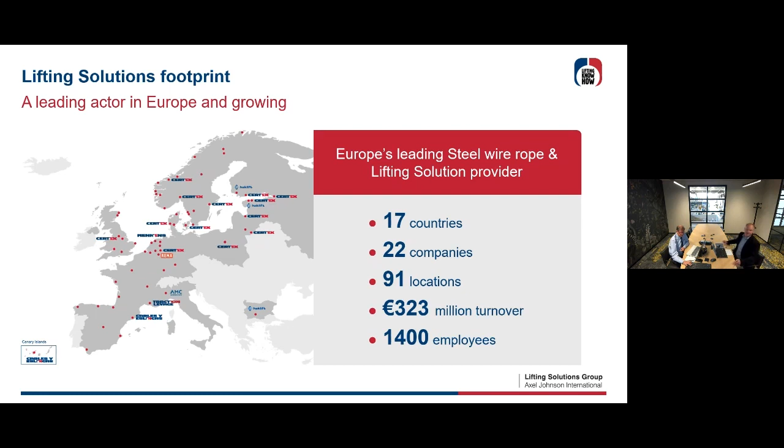A very warm welcome from Alain Ballman. I'm a Flemish Belgian, and I've been 35 years now in, let's say, the same company, Mennens Certex. I'm doing investigations, advice, climbing into cranes - even though I'm 61 now - doing reports. We have a laboratory to investigate steel wire ropes and so on. So if you have a question, just call us, we'll do our best.

These are the subjects we're going to tackle in this webinar. For those who didn't see the first presentation about the basics, we'll rehearse a little bit what we saw last time. If you really want to see the first webinar, you can click on the link, or we'll send it to you - it's basically about steel wire, wires, ropes, and constructions.

So we're going to elaborate on high performance ropes today: what is the difference with the general purpose ropes we saw last time, the advantages of these high performance ropes, and the applications. The second chapter is about rotation resistant ropes, a completely different kind of rope - what is it, why, classifications, and applications.

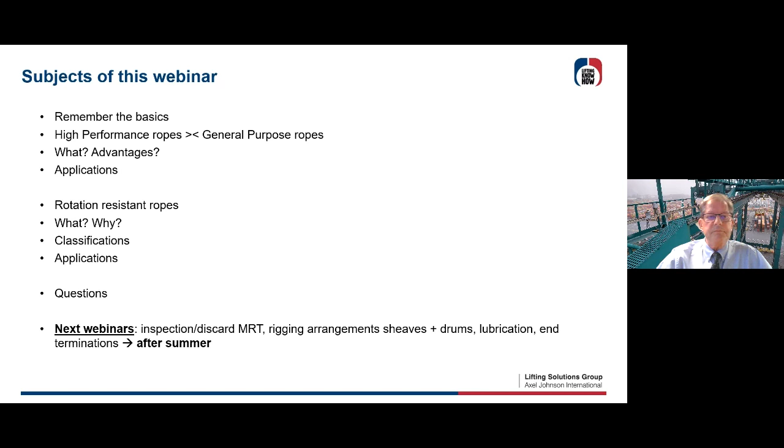Okay, let's start again with what we saw last time, a little bit of basics. This is how normally a wire rope looks like: you have a rope which consists of some strands, 6 or 8 or more, and in these strands you have your separate wires.

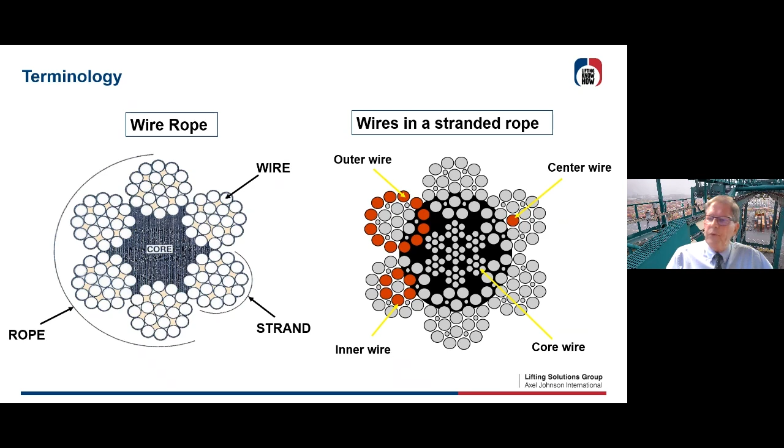If you look on the right side, you have the outer wires in one strand, which come into contact with sheaves and with your drum. Inside the strand you have the inner wires, shown in red. And in the center of each strand you have the center wire. So 6 or more of these strands surround the core, forming an independent wire rope core inside your 6 strands.

So we explained last time how a wire rope is made. We do that in 2 steps. The first step is making strands. Here you can see on the machinery the stranding, and then we put some lubrication into the strand.

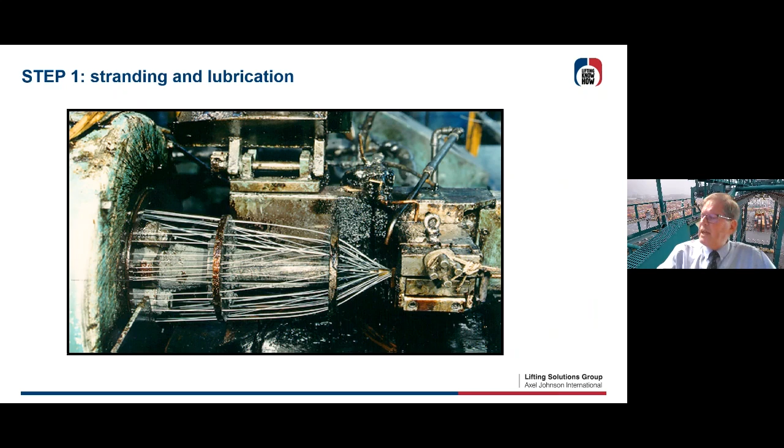The second step is that we take 6 or more strands, put it on another machine, and do the closing of the wire. So we put 6 strands around a core, and you see the preformation. The preforming is the helix we do with each strand before it goes into the knot, so that the preformation makes the rope eased and flexible.

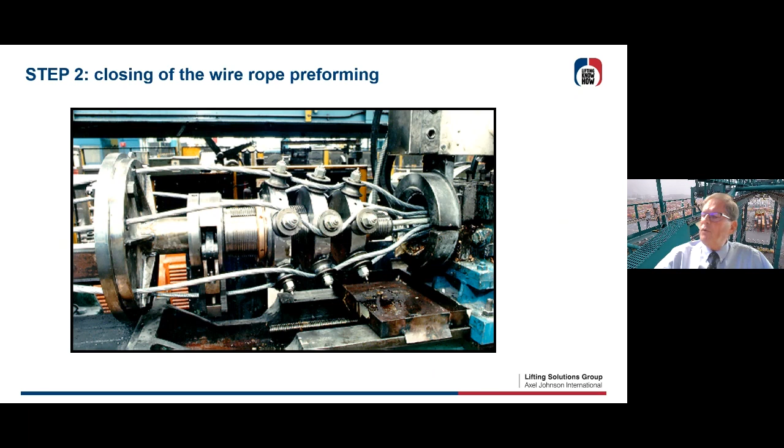General purpose ropes, often used, are 6-strand ropes. Here you see the 6x36 Warrington Seale with the independent rope core on your left side, or there are some who prefer a fiber core, a man-made fiber core inside, which has the advantage that you can have a certain amount of grease inside your rope, so there will be greasing coming automatically during the lifetime. You see the advantages of the steel core versus the disadvantages of a plastic core, as we explained last time.

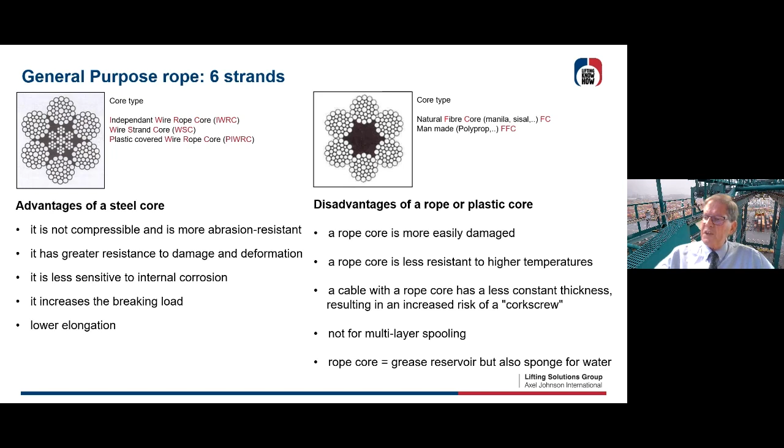You could also use 8-strand ropes. These ropes have 8 strands on the outside, and you see there's a little more complicated inner wire rope core needed to fill up this space. But you have the advantage that the rope is much rounder, comes more into contact with your sheaves, so you get lower contact pressures, less wear into your grooves, and a more flexible rope. So it's normally going to last longer.

Keep that in mind: 8-stranded ropes are more flexible, and a bit more expensive, of course, because it's more difficult to produce - you need more different kinds of wires. But it's always interesting to have a longer lifetime on your crane.

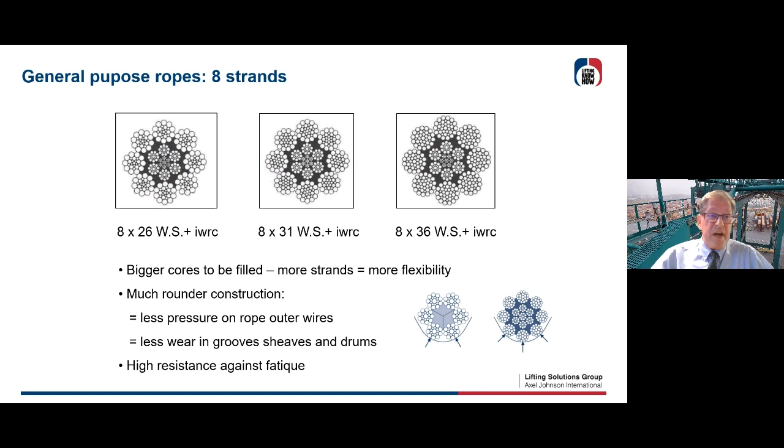And then we talked about the rotation resistant ropes. These are ropes where the core is inverted. We said every rope with more than 10 strands on the outside would normally be a rotation resistant rope - a non-rotating rope, or in French, anti-giratoire. So the core is inverted. This is especially useful for very high hoisting applications like tower cranes, mobile cranes, or if you only have one part hoisting, then you normally need rotation resistant ropes.

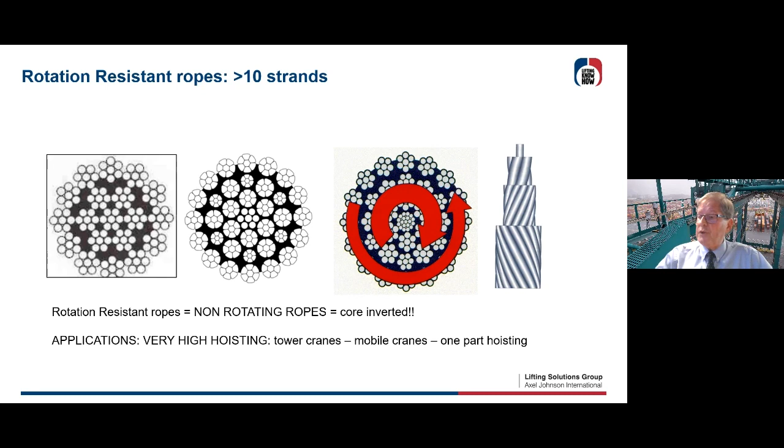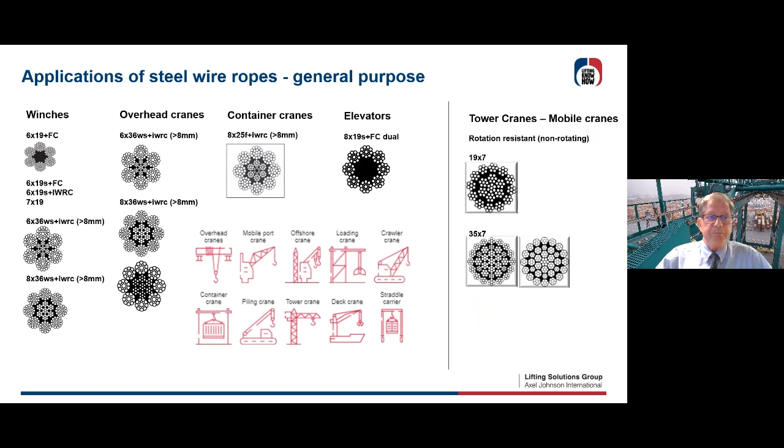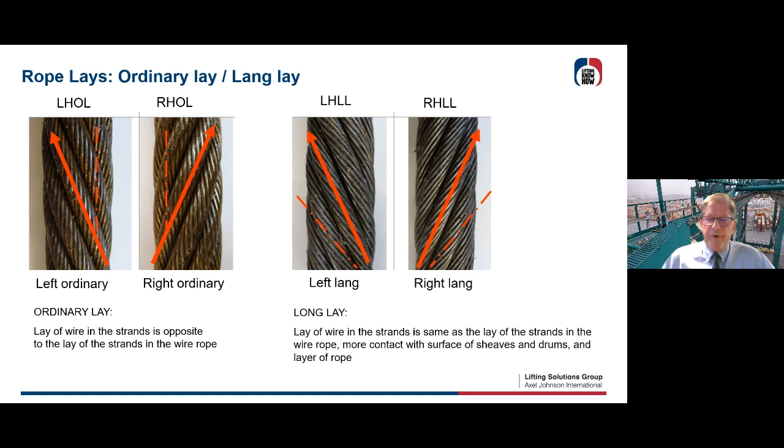We explained why you really need right and left-handed ropes. If you put a load on a 6 or 8-stranded rope, this rope will open up, so you get a torque or a moment in your rope. The more load you put on the rope, the more torque you get, the more rotation you get on your rope - so your load will turn.

That's why in some applications you need a left and right hand rope, so that these moments of the left and right rope end up together as zero, and then your load will stay straight. That's why in some applications you need left and right hand ropes combined in a set, so you can easily work. You also need left and right handed ropes because drums have left or right cut grooves - on left grooves you normally need a right-handed rope and the other way around. So that's why you really need right and left hand ropes in some applications.

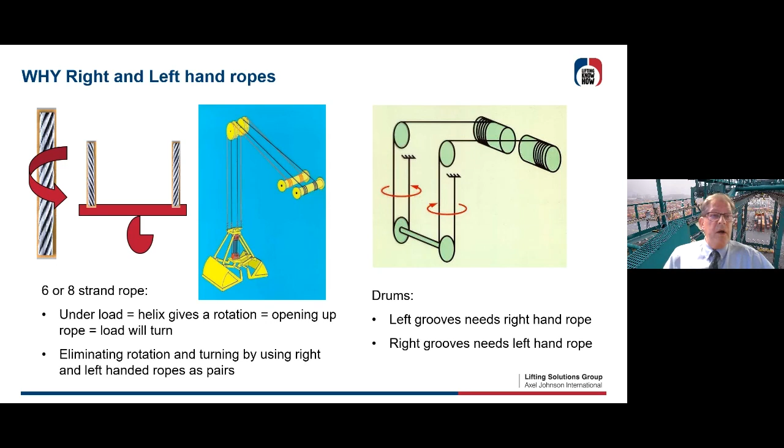Okay, now let's talk about high performance ropes. What do we mean by high performance?

They do the job, but if you want something special, then we could advise you to go to the high performance. And what is high performance?

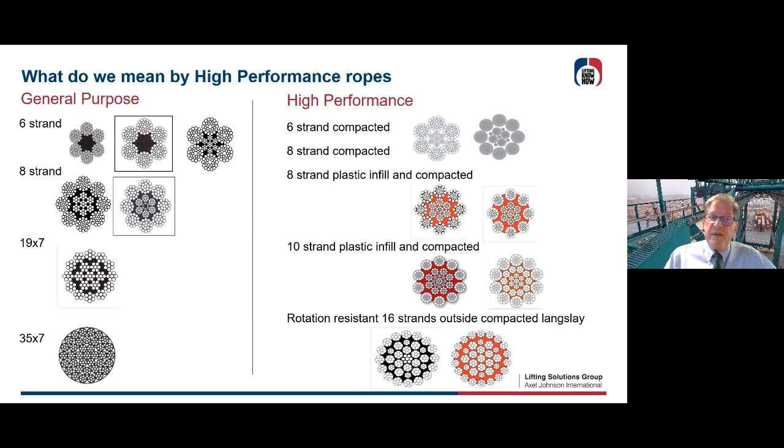More specialized ropes will be 10-stranded ropes with 10 strands on the outside. So you're going to have a rounder rope, stronger, and also with the plastic infill and also compacted. And the rotation resistant ropes, we call them high performance if they have 16 strands on the outside, eventually compacted, in Lang's lay on the outside, and also if you want with a plastic infill. So this is the big difference between high performance ropes and general purpose ropes.

So what are high performance steel wire ropes? Well, we're going to show you what and how. We have the plastic infill between the strands and core. We have compacted strands. Sometimes we have hammered strands, I'll explain later, and sometimes you can go for double parallel ropes, which are much stronger and used in special applications.

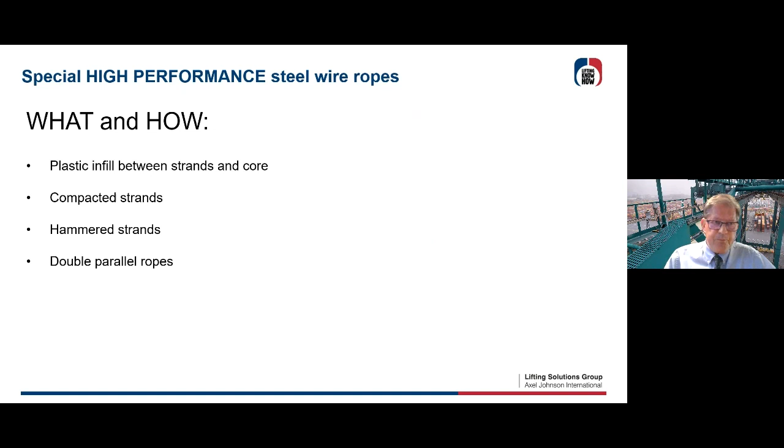So first of all, I'm going to talk to you about the plastic infill. If you have this plastic layer between your rope core and your strands, that means you don't have any more internal wear. There are no more contacts between the outer strands, wires, and the wires from the steel wire core.

So there will be no more contacts between strands and strand cores. It keeps the grease, the original grease from the wire core, inside. So don't worry about greasing or things happening inside your rope. It will stay there till the end of its lifetime. It keeps water, dirt, and mud out of your wire rope, so don't worry about water applications—you won't get rust from the inside. It keeps all dirt outside. And it will increase the stability of the rope.

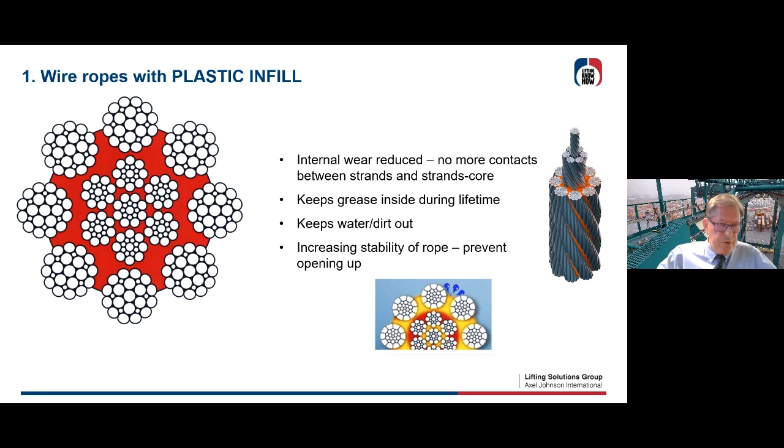If somebody would try to open up this rope, the plastic layer will prevent it from opening and will keep all the outer strands in place. If you want to re-grease or lubricate your rope again, you just have to re-lubricate the outer strands, so you don't need as much grease or oil to lubricate your rope again. That's what about the plastification.

You can see that you have a higher breaking load.

There is more steel into a given diameter, and you're gonna have much more contact because the rope will be much rounder. So you have more square millimeters of contact with sheaves and drums, which gives you a lower contact pressure, lower wear on your rope, but also lower wear on your sheave groove and on your drums. Very important, because sheaves and drums cost a lot more than your rope.

You have a higher flexibility with lower stress. You have a smoother wearing surface of the rope between drums and sheaves, but also, if you have a multi-layer, between the ropes themselves.

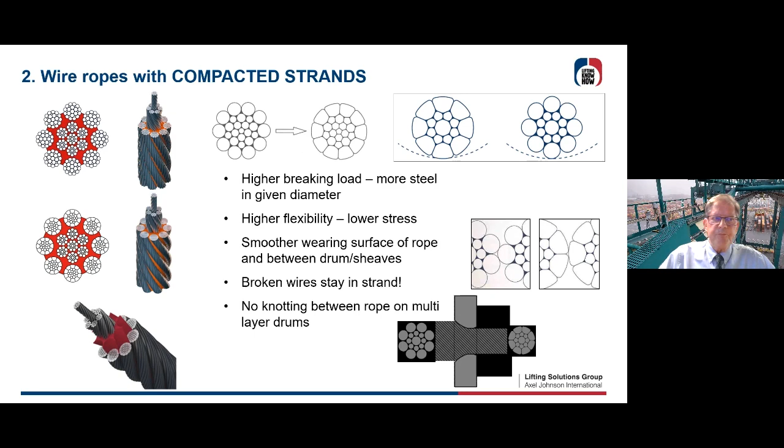A third manner of making ropes more round is the hammering. You have a certain compacted rope which could be hammered, and then you see the roundness of these ropes getting more round, and the rope will get more flexible in certain applications. The outer strands are compacted and then hammered, so you have more contact with sheaves, more contact with drums.

And also more contact between the different layers on multi-layer drums. The cable is even more robust, and you have more metal in your section, so the rope will be much stronger.

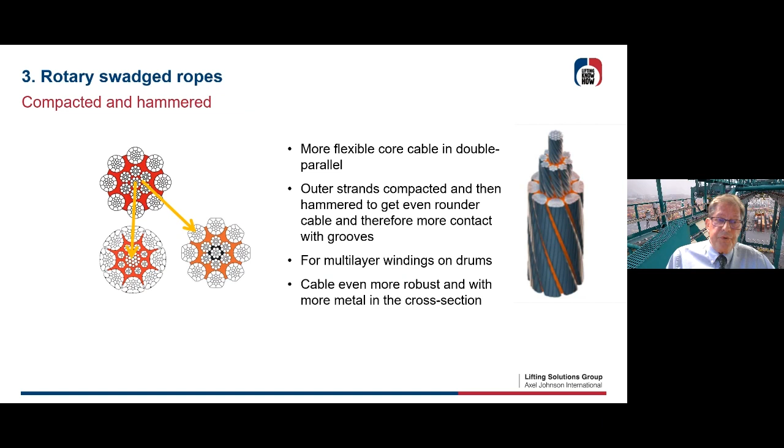Another idea about making ropes stronger and more flexible is the double parallel 8 and 10 strands. What do we mean by that? Normally, ropes in 8 strand, as you see on the left side, have a 6-stranded inner core. We could double it up, just like 8 strand on the outside, but also 8 strand on the inside, so that every strand will be laying into 2 underneath laying strands.

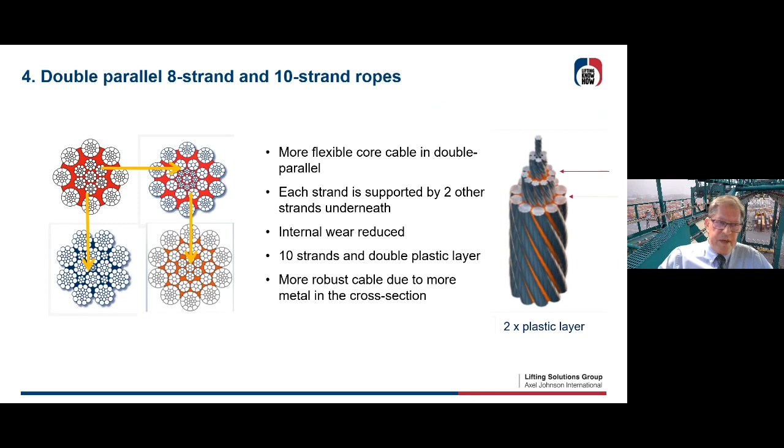We could do it even with 10 strands, so you have 10 strands on the outside, and then a plastic layer, but on the inside you also have 10 strands underneath the 10 outer strands. If you look on the right side, you have this typical 10 strand with a double plastic layer, a plastic layer between the outer strands and the core, but also an extra plastic layer in the core which prevents things from opening up and keeps all properties and all grease inside. So these are the double parallel and 10-stranded ropes we advise in some applications.

So let's say, what are the advantages again of the high performance rope? It will give you an increasing breaking force of about 30% stronger. So look that up, because in some applications you can go down in diameter, which could have a lot of advantages for your sheave diameter or your drums. Or if you just leave it like this, you have a rope which is 30% stronger, giving a higher safety factor, let's say.

For the increasing performance, you normally have a longer lifetime. You could double, triple, depending on the applications. You will have more cycles, because with all these different compactions and plastic infill and the grease that stays inside, you could do more tons without any problem. So you don't have to worry what is happening inside, you just look at the outside, and wait until you have, let's say, the fatigue coming in the outer strands.

You have more stable diameters, because when this rope is rounder and compacted, you will go down in diameter reduction just by wear coming on the outside of your strands. In general purpose ropes, you have a lot of air into or between the strands, and this will give you from the beginning a diameter reduction.

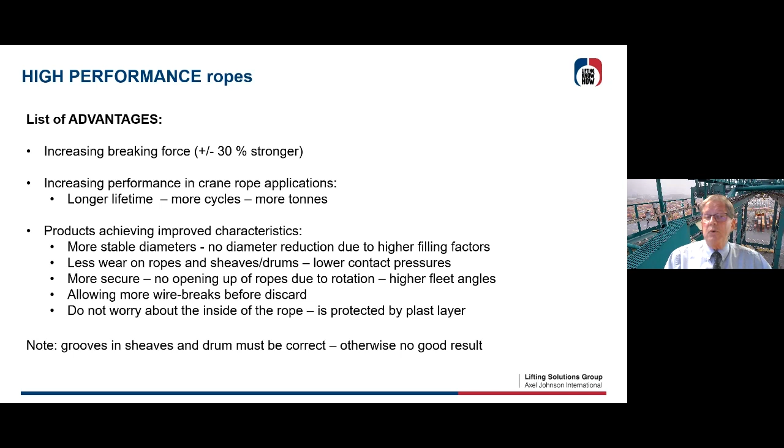Okay, you propose some high performance ropes to a client, and he says, oh wait, I have a lot of problems with this overhead crane. Let's put it on there and see if things work. We're not going to have a good result if the grooves are badly shaped or worn in. This kind of high performance rope won't have the possibility to get quickly into a thinner diameter, and you're going to have a lot of wire breaks immediately showing on the outside. So don't put it on grooves or sheaves which are completely worn out.

Okay, let's talk about price in this high performance category. I've made a table here with some price indications. You have 6 strand rope - if it's priced at 100, general purpose ropes in 8 strands will be about 20% higher in price, but the strength will also be about 10% higher, sometimes 20%.

If you go to high performance, 8 strands with plastic infill and compacted, let's be honest, it's going to be double the price, with about 20% more strength. But the lifetime will double, as you can see.

Even if you go to high performance 10 stranded, the price will be about 240 or so, with 35% more strength in your rope. Even with the double plastic compacted 10 stranded, you're going to see you end up with 40% stronger ropes, at a price that's 2.5 times higher. But look at the lifetime - it's going to be 3 or 4 times longer.

Believe me, if the installation is correct, you'll be surprised how long these ropes last. The gain is in installation cost - you're buying a pricier rope, but as you look into the table, it will save you 1, 2, or 3 installation costs. So your assembly cost and downtimes will be less, and wear on the grooves will be minimal. The only fatigue you'll have is on the outer strands, so your core stays intact.

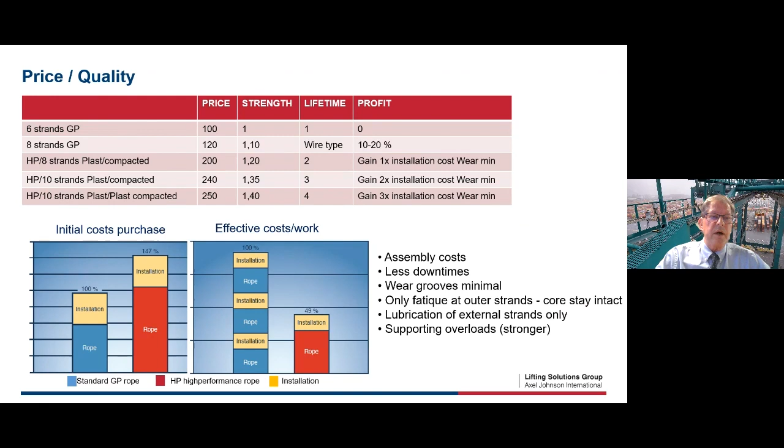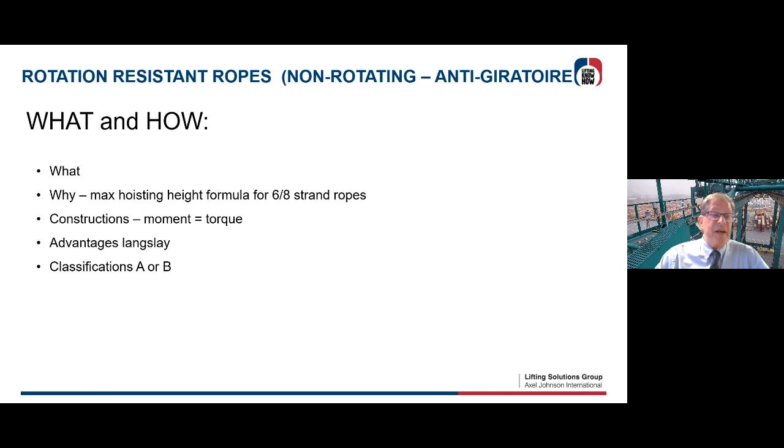That's the first chapter. Now let's talk about rotation resistant ropes, also called non-rotating, or in French anti-giratoire. What is it? Why do we need these kinds of ropes? I'll explain the constructions, the advantages, and the classification.

What is a rotation resistant rope? It's a rope where the core is in the opposite direction than the outer strands. It is used in one-part reeving systems, so if you have only one part of a rope coming down for hoisting, and for great lifting heights like on mobile cranes and tower cranes.

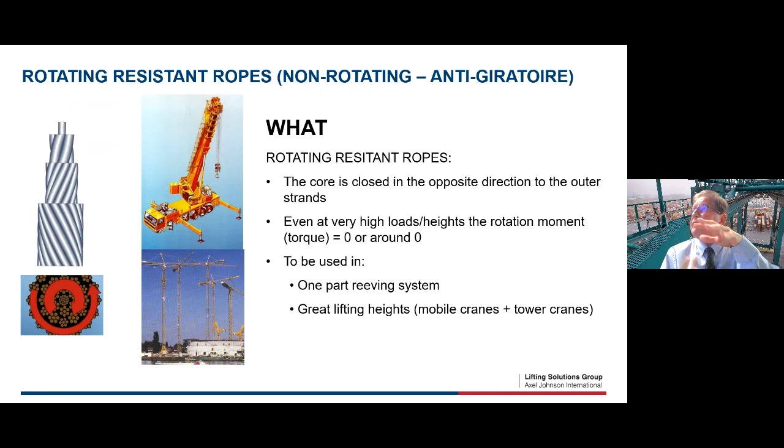Even at very high loads, you won't have a rotation moment or torque in this kind of rope, because if you load it, the outer strands would like to open up, but the inner core is closing up. So you get a calibration from the rope itself, and it won't have a moment or fatigue.

Rotation resistant ropes compared to 6 and 8 stranded ropes - those give under a certain load a rotation moment, or torque, due to the helix form from the outer strands.

In a block with one sheave or in a block with two sheaves, 6 and 8 stranded ropes give on each strand a rotation, and all these rotations are in the same direction. So if you put a load on your block, the block will turn.

To prevent this, you normally need to install a rotation resistant rope. With this rope, each strand will have no moment and your block will stay steady.

With rotation resistant ropes, you have two kinds. If the moment or torque is 0 or almost 0 up to about 80% of the minimum breaking load, we speak about rotation resistant ropes, or 100% rotation resistant ropes. If it's almost 0 only up to 40% of the minimum breaking load, we speak about a semi-rotation resistant rope. I'll explain this later.

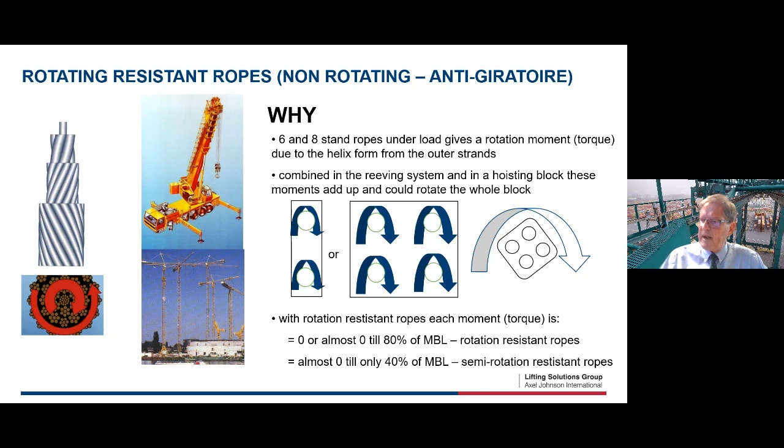How could you identify if you really need a rotation resistant rope or not? Well, there is a certain formula you can use to decide what would be the maximum lifting height.

I'll explain quickly. If you have a 6 or 8 strand rope in a certain constellation on your crane, you put some figures into this formula. S will be the effective spacing between the different parts of your ropes - normally the diameter of your sheaves up on your crane or down on the block. You could also make an average of both top and block sheaves. So you put that into the formula.

Then you have the diameter of the cable, that's little d, you put it into the formula. And then you have two constants. Constant C1 is for if you have even parts in your reeving system, or a different value if you have odd numbers of parts. Constant number 2 is depending on the type of cable: 6-stranded with fiber core, 6-stranded with inner wire rope core, or 8-stranded with inner wire rope core.

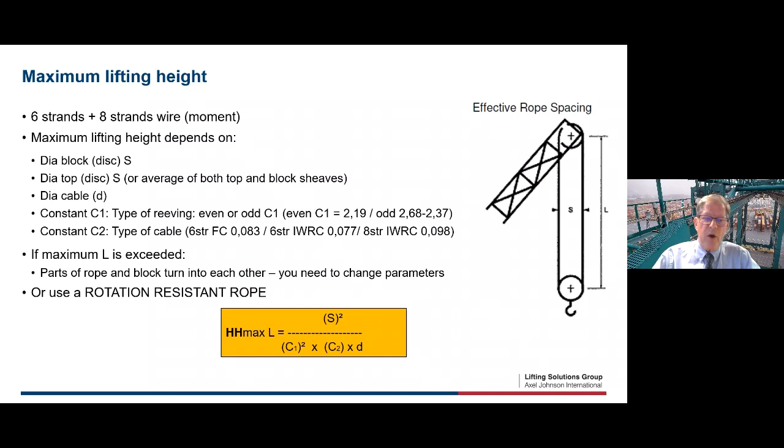Rotation resistance ropes, let's repeat, what is it? The core is reversed. Why should we use it? You use it instead of normal torque ropes in 6- or 8-strand construction. You have semi-rotation resistant and rotation resistant ropes. It depends on the number of outer wire strands and the construction of the core.

For the rotation resistant rope, the moment will be zero. For the semi-rotation resistant, your moment will not be zero, certainly not till 80% of the minimum breaking load. So where do you use it? You use it in one-part hoisting, or in high lifting. Just take the formula, count what you need, and you'll normally have an idea if you need a rotation resistant rope or not.

Where not to use rotation resistant ropes: where you have shocks. If you have shocks, you're gonna destroy the core inside. Don't use them if you have too small sheaves, because your core will be damaged. If you have this kind of rope going around a very small sheave, you're gonna damage the core, which is inverted inside, so be careful.

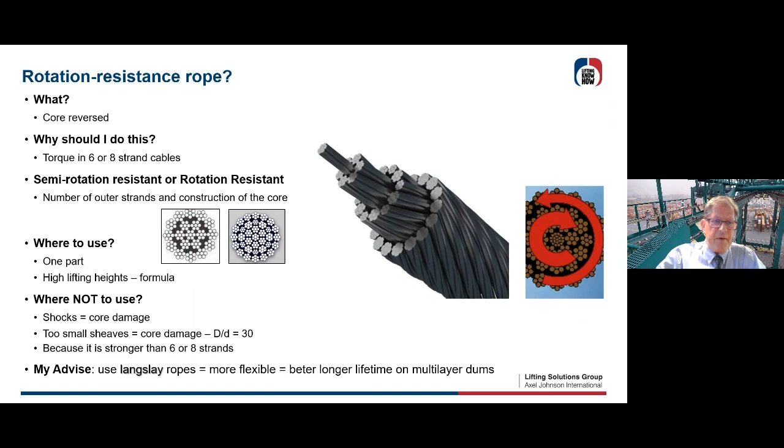So I would give you now an idea about all the different rotation resistant ropes that exist. You have here also an idea about what we call semi-rotation resistant ropes, where the moment or torque is higher than zero, could be higher than zero.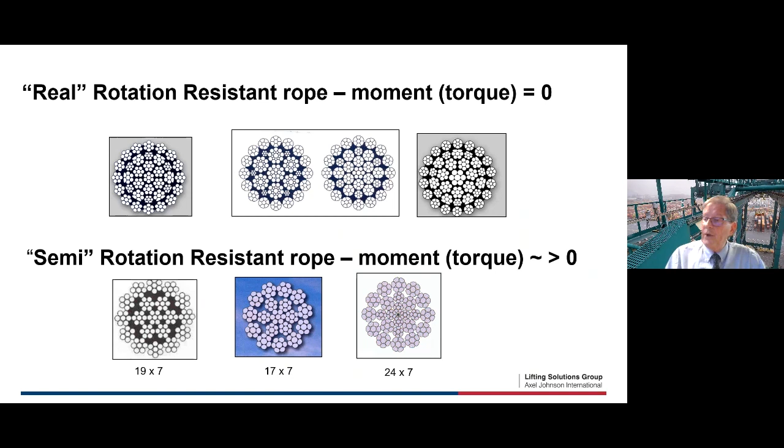The problem years ago was that somebody really ordered or wanted a rotation resistant rope, and they sold the guy a semi-rotation resistant rope. Therefore we have this classification, and that's why ropes with a very complicated inner rope core are now classified non-rotating class 1 or A in England, or non-rotating class 2 or B if it's semi-rotation resistant. There is a very great difference in working with these ropes.

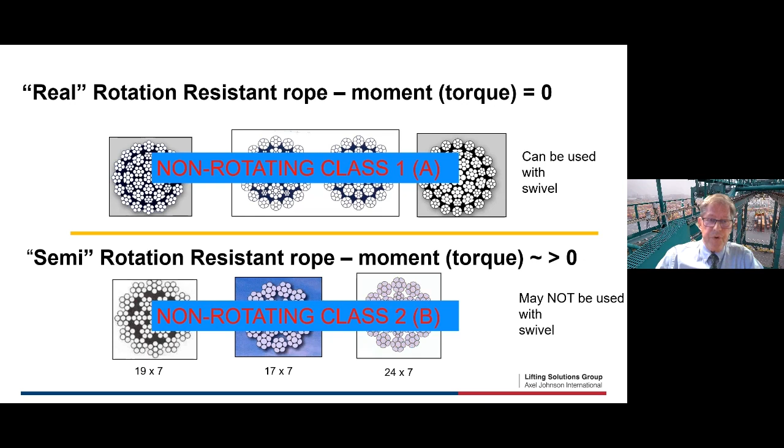Real rotation resistant ropes can be used with a swivel on your crane. The semi-rotation resistant ropes may normally not be used with a swivel, because the inner core is inverted, and in some cases you're gonna end up only loading the inner core. So never use a swivel with semi-rotation resistant ropes, it's very important. That's why if you ask our companies for a rotation resistant rope, just look on your certificate to see if you have a class 1A or a class 2B classification for your rotation resistant rope.

I have an overview of all the non-rotating, anti-giratoire, rotation resistant ropes which are on, let's say, the European market. Look, they're gonna sell you all these types of ropes as a rotation resistant rope. Look at the different number of outer strands, you have 16 outer strands, 18 outer strands, 15 outer strands. There are even some with only 12 outer strands, 15, 16, 14. The most important thing is how does it look on the inside?

And you're not going to see the inside, you're never going to see it. But look at the different constellations of inner rope core. I'd say 16 outer strands and 19 inner strands will give you a good quality non-rotating or rotation resistant rope. But as you can see with all these different kinds of cores, prices can be very different, and also the torque or moment which ends up in your blocks and so on can be very different.

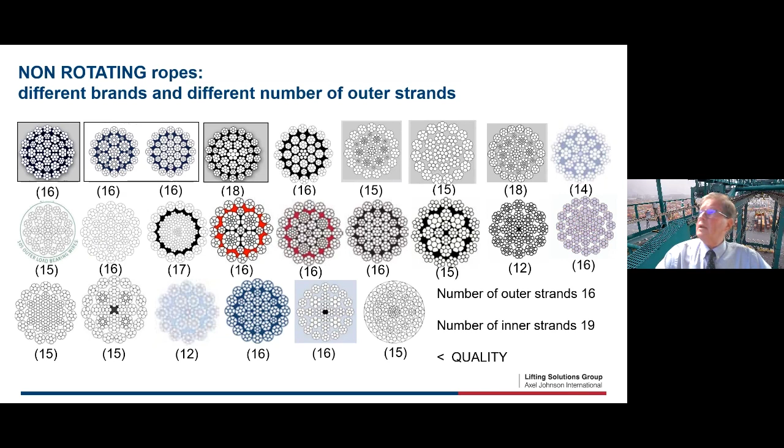Price will be different, but your rotation resistance will also be different. If you have doubt about this, we can give you advice on what kind of rotation resistant rope you need. Anyhow, rotation resistant ropes can give you some problems, and many times the block is also turning with a rotation resistant rope.

Where does this come from? Well, there's a certain rule. If your block is turning without load on the block, then you really have a crane problem. This means something is wrong with the grooves of your sheaves, or something was wrong when you put the rope on your crane. You put a rotation into the rope, and that's why even without load, your block is turning. So I call this a crane problem.

If the block is straight, and you put a load on it, and then suddenly your block is turning, then I call it a rope problem. Because you put load on your block and you have a block which is turning, that means each part of your rope will give a rotation. So there's a problem with your rope rotation, with your rotation resistant rope. Just then look at a rope with another type of rotation resistance, a lower torque factor or something.

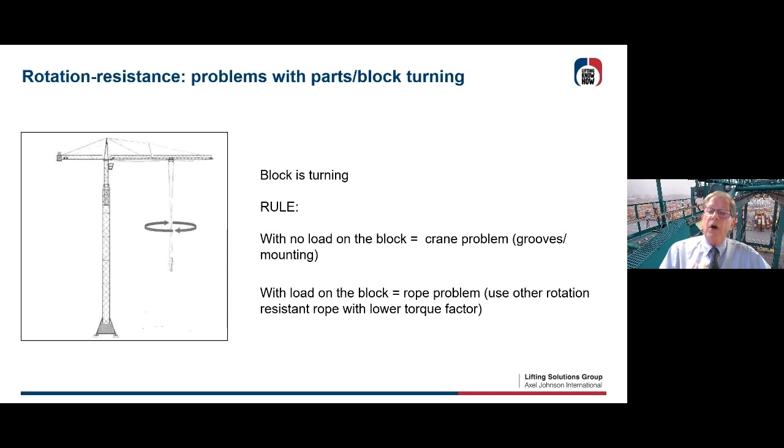So this is a rule: with no load on the block and the block turning, it's a crane problem. With load on the block and turning, it will be a rope problem. Very important to mention also with rotation resistant ropes is that normally, if you have the time, you need a running-in period for this kind of rope.

After installation on a tower crane or on your mobile crane, you have to make sure that the whole rope will adjust itself in diameter so that the initial stretch will disappear. Your rope will come to its exact diameter and the rope will be set. It will come to an easing point, let's say, in your sheaves, in your drum.

And how can you do that? Well, you pick a load of about 20% of what you normally take with your crane, and you ride around, using all parts of the rope going through your sheaves. You do it several times, then afterwards you do it with 50% of the load. It's like an athlete who is going to make an Olympic performance—you have to train your rope. Then if every part of the rope is at ease, you start working with it.

Believe me, if you do this—and not many people do because they don't have time—you avoid problems. If there's a problem on your tower crane, quickly we change the rope. Okay, the rope is changed, we're going to work tomorrow with the tower crane. They don't have time anymore, they're working.

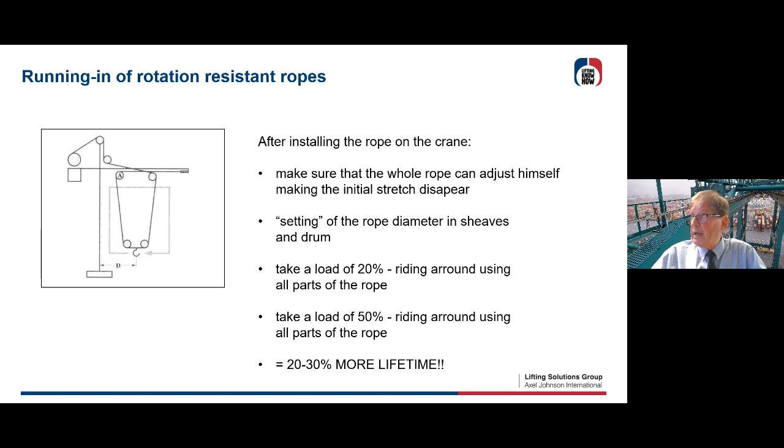This is very important. So do the running-in, think about an athlete, and you're going to gain lifetime. And remember, rotation resistant ropes are more expensive, so take care—consider doing the running-in.